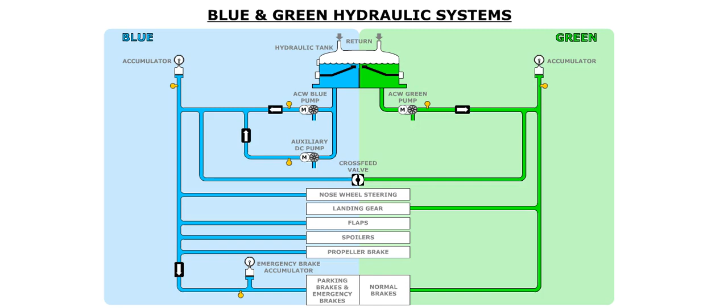The main components of the hydraulic system are located in the left landing gear fairing, aft of the main tires. These components include the pumps, accumulators, connectors and the main reservoir. Unlike other aircraft, the two hydraulic systems have a crossfeed valve that enables one system to pressurize the other system's components.

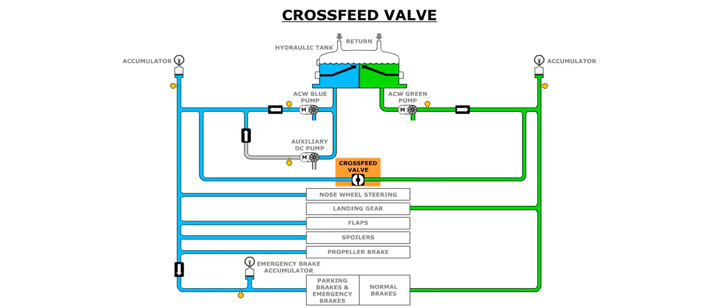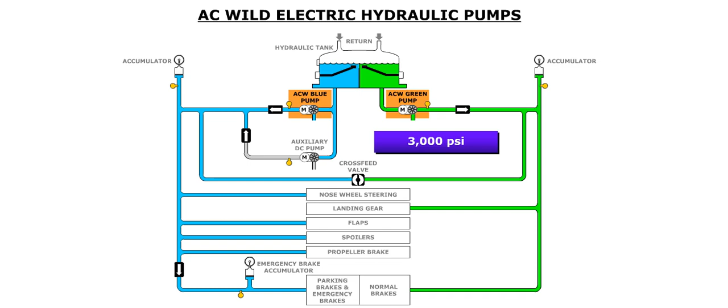Each hydraulic system is pressurized by an AC wild-powered electric hydraulic pump. Each pump delivers hydraulic pressure at 3,000 psi. The blue pump is powered by AC Wild Bus 1, and the green pump is powered by AC Wild Bus 2.

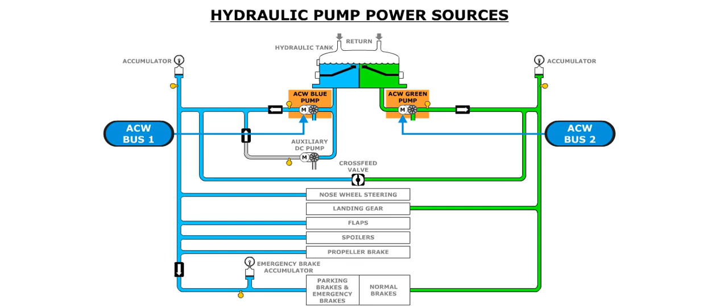The blue system has an additional auxiliary DC-powered pump that can be used to pressurize the blue system components when the aircraft is on the ground with no power. Even though you can cross-feed the two hydraulic systems, you should not cross-feed when the auxiliary pump is being used.

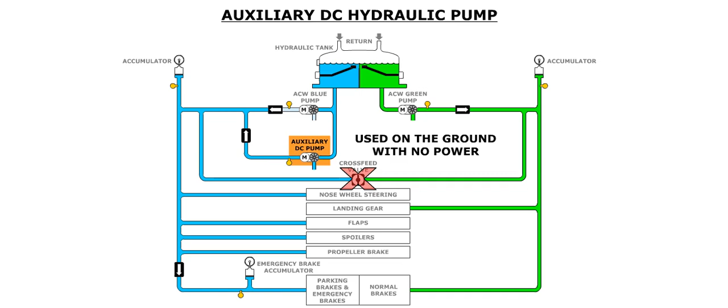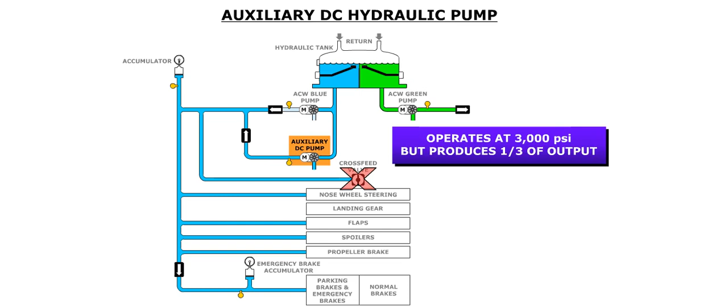Although the auxiliary pump operates like the other pumps at 3,000 psi, it is a smaller pump and it only produces about a third of the output. This pump runs automatically when the blue system pressure drops below 1,500 psi, the propeller brake is released, the gear handle is down, and at least one engine is running.

The blue hydraulic system supplies hydraulic pressure to the nose wheel steering system, the flaps, the spoilers, and the propeller brake for the right engine. In addition, the blue system supplies the emergency and parking brake system.

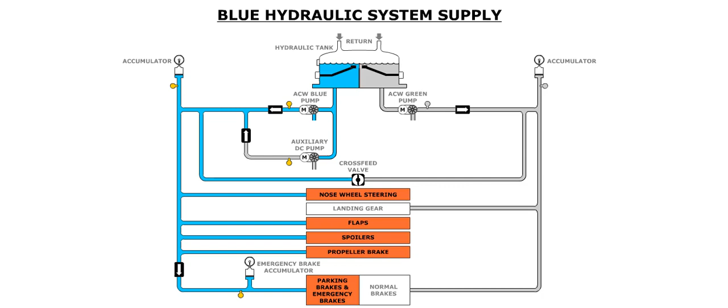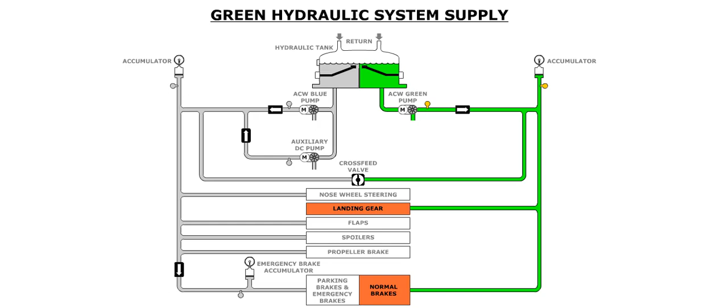The blue system distribution is depicted on the AC Wild hydraulic page on the multi-function display, or MFD. The green hydraulic system supplies the landing gear system and the normal brakes. The green system distribution is also depicted on the AC Wild hydraulic page on the MFD.

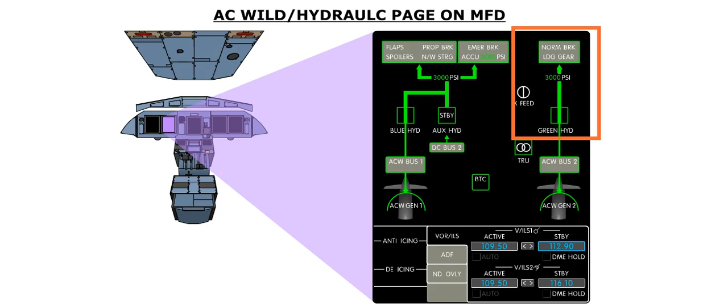The two hydraulic systems use a common hydraulic tank that is located in the hydraulic bay. This bay is in the left landing gear fairing. The tank is a direct air fluid contact tank that is not pressurized. A baffle prevents splashing of the fluid and limits foaming.

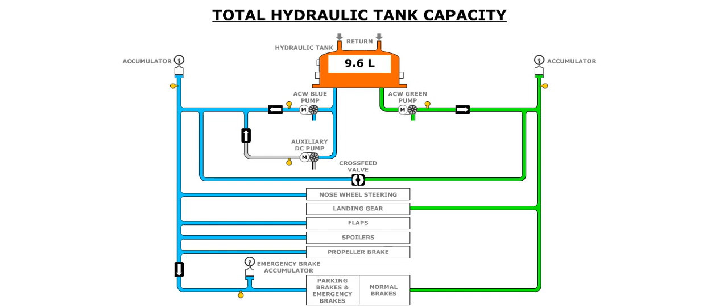The total capacity of the hydraulic reservoir is 9.6 liters. A sight gauge is used to determine the quantity of the fluid in the reservoir. When the reservoir is full, the fluid level will be even with the upper mark of the sight gauge. A full indication means that there is a total fluid quantity of 9.6 liters.

The lowest line on the sight glass is labeled refill. This line indicates the minimum quantity of hydraulic fluid required. When the reservoir fluid level is even with this refill line, there is a quantity of 8.5 liters. The aircraft has sufficient hydraulic fluid for flight, as long as the hydraulic fluid quantity is above the refill line.

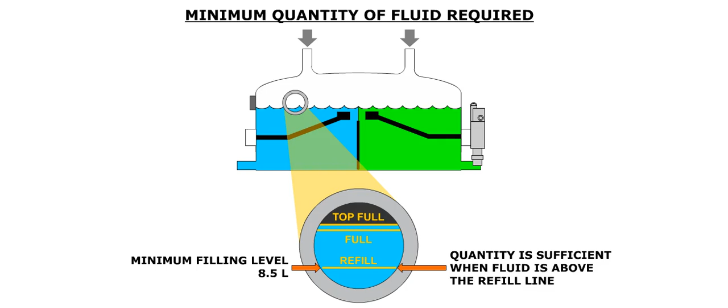When the hydraulic reservoir is filled, hydraulic fluid is added until the fluid level reaches the normal filling level. When the fluid level is even with this line, the hydraulic reservoir contains 9.35 liters.

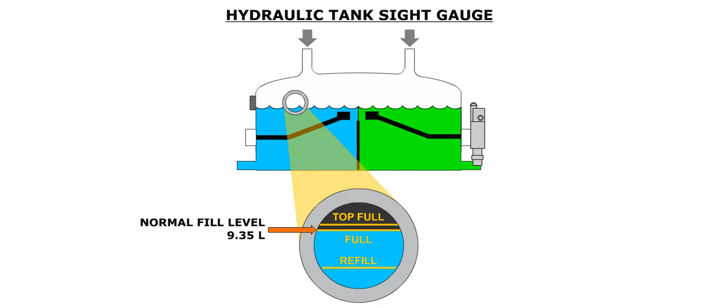Hydraulic fluid is added to the tank through the filler cap. Skydrol is the most common brand of fluid used. Approved fluids are Skydrol LD4 and Hyjet 4.

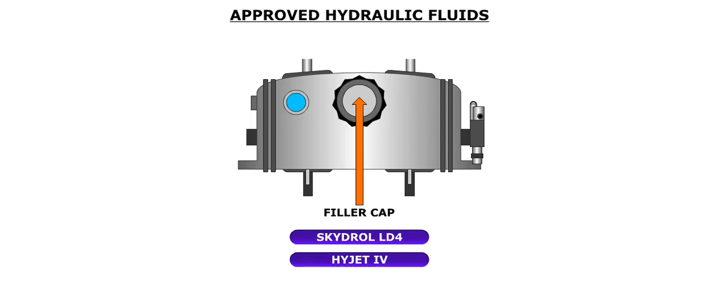The hydraulic tank is divided into two compartments that supply the blue and green hydraulic systems. Each compartment has a fluid capacity of 4 liters. The top of the tank divider is below the minimum filling level.

If a leak develops in one of the hydraulic systems, the fluid quantity in the reservoir will decrease below the level of the compartment divider. At that point, the fluid in the compartment that services the system with the leak will continue to decrease until there is no more fluid remaining in that compartment. The other compartment will continue to supply hydraulic fluid to the system without a leak. Click on the tank to see the effect.

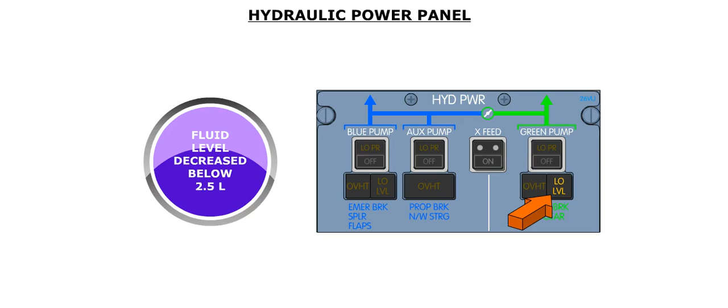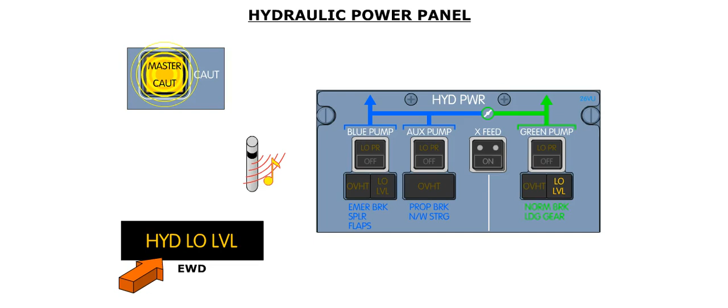The hydraulic fluid quantity in each reservoir compartment is monitored by an associated low-level light on the hydraulic power panel, located on the flight deck overhead panel. When the level in a compartment decreases below 2.5 liters, the associated low-level light illuminates amber on the hydraulic power panel, the master caution lights flash, a single chime sounds, and the amber hydraulic low-level message is displayed on the engine and warning display, or EWD. In addition, the crossfeed valve closes automatically, if it was open.

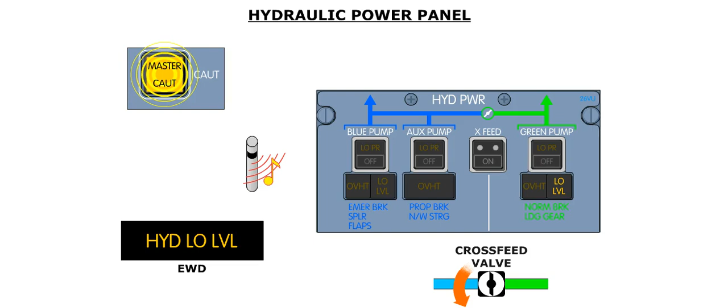Two drain ports located on the bottom of the tank are used to drain fluid from the hydraulic reservoir. Two clogging indicators monitor the blue and green filters, in order to identify the presence of particles that have entered the system. These particles could potentially cause clogging.

The indicators look like turkey pop-up timers and are visual indicators only. There are no cockpit warnings. They are located on the aft side of the reservoir.

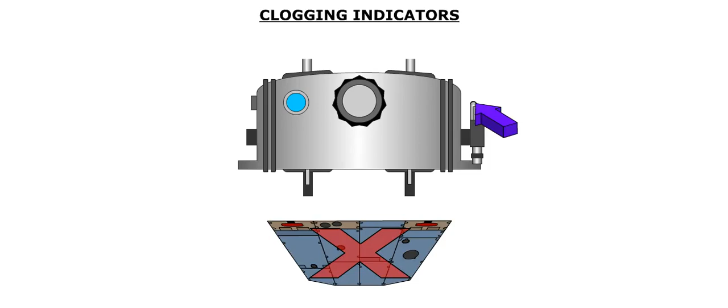An overflow port relieves any excess fluid from the tank. This excess fluid may be due to overfilling or thermal expansion. After the hydraulic fluid travels through each system, it is returned to the hydraulic reservoir through two return lines, located on the top of the reservoir.

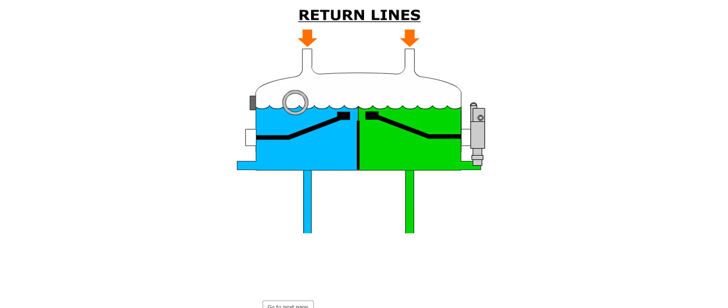We will now look at the green hydraulic system.

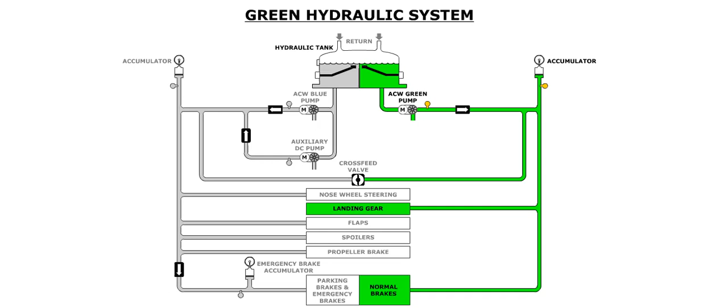The green hydraulic system is pressurized by an electric hydraulic pump. The pump is powered by the AC Wild Bus 2, and it has a normal pressure output of 3000 psi.

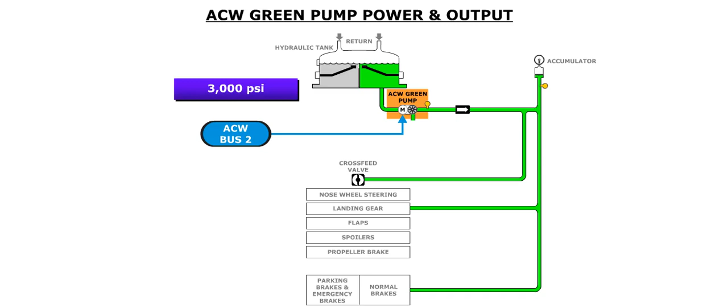The output of the green hydraulic pump is monitored by a pressure sensor, downstream of the pump output. When the green pump pressure drops below 1500 psi, an associated low-pressure light illuminates amber on the hydraulic power panel.

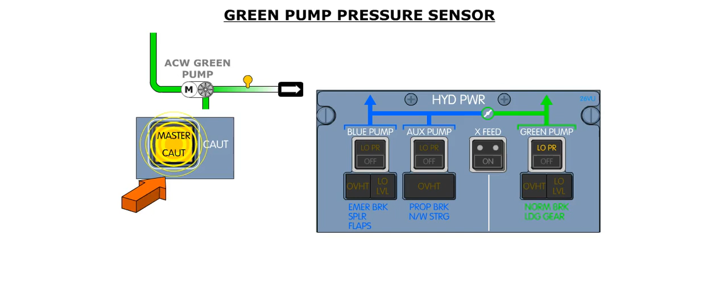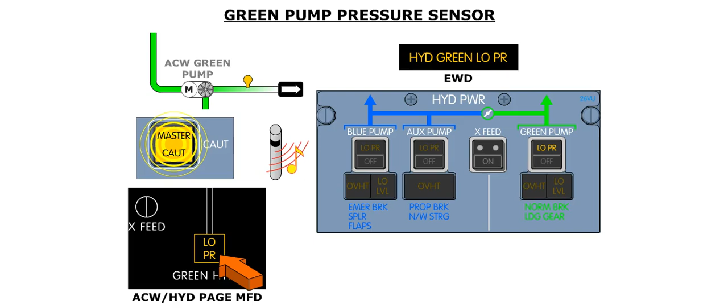In addition, the amber master caution lights flash, a single chime sounds, an amber hydraulic green low-pressure message is displayed on the EWD, and an amber low-pressure message is displayed on the AC Wild hydraulic page on the MFD. In addition, the system components powered by the affected system are displayed in amber on the AC Wild hydraulic page on the MFD.

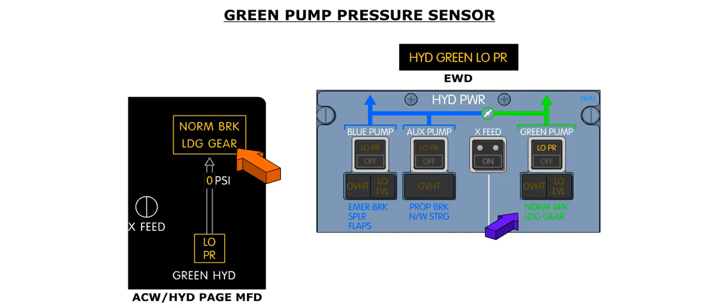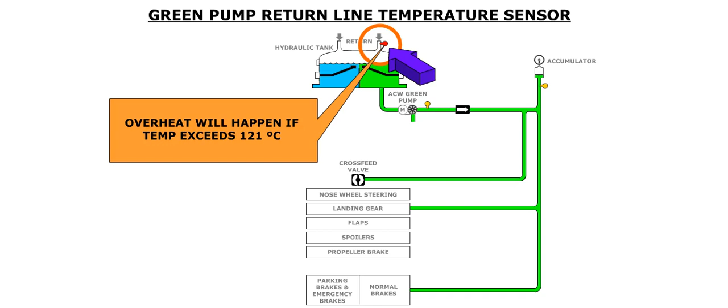A temperature sensor is mounted in the return line of the green hydraulic pump. When the pump case drain line temperature exceeds 121 degrees Celsius, the associated overheat light illuminates amber on the hydraulic power panel.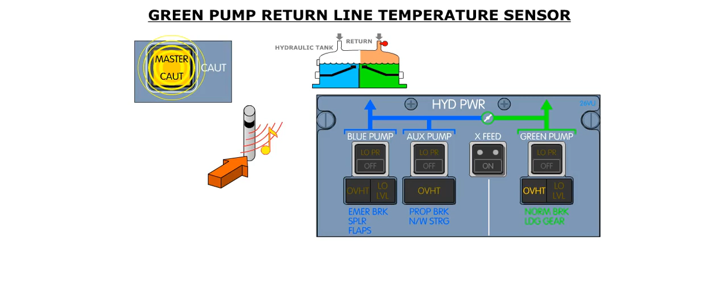In addition, the master caution lights flash, a single chime sounds, an amber overheat message is displayed on the AC Wild hydraulic page on the MFD, and an amber hydraulic overheat message is displayed on the EWD.

This indication may signify that bearing failure is impending for that pump. The corrective action for an illuminated blue or green system overheat light is to select the associated pump push button

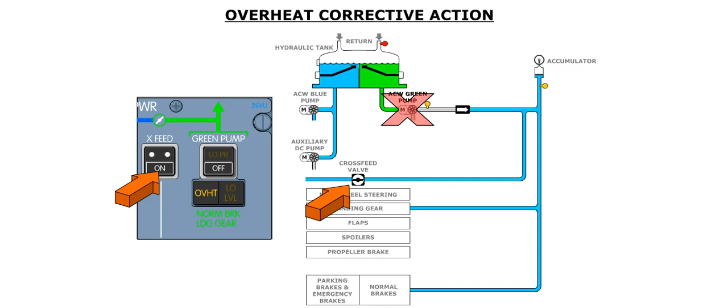to off, and then select the crossfeed push button to on. Once the system has cooled back down, reselecting the pump push button to on is permissible.

Downstream of the hydraulic pump, the hydraulic fluid travels through a one-way check valve. This check valve prevents the backflow of hydraulic pressure into the green system pump, in the event the crossfeed valve is open and the blue system is pressurized.

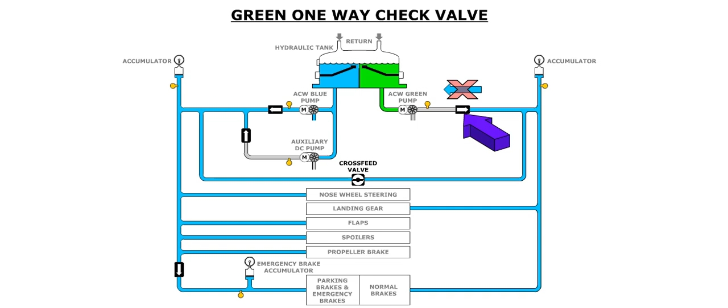The green system has an accumulator fitted in the line. The accumulator consists of a bottle that contains a charge of nitrogen. The nitrogen charge is separated from the hydraulic fluid by a piston.

The accumulator acts like a shock absorber against pressure surges due to pump operation. The accumulator also assists the hydraulic pump when there is a high demand on the system.

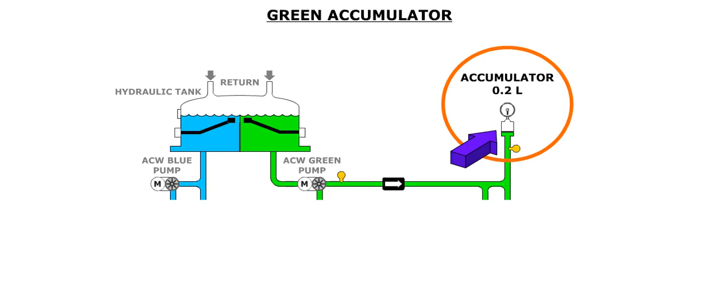The green hydraulic system pressure is indicated on the AC Wild hydraulic page on the MFD. The pressure indication is in thousands of psi. The sensor for the green system pressure indicator is downstream of the check valve.

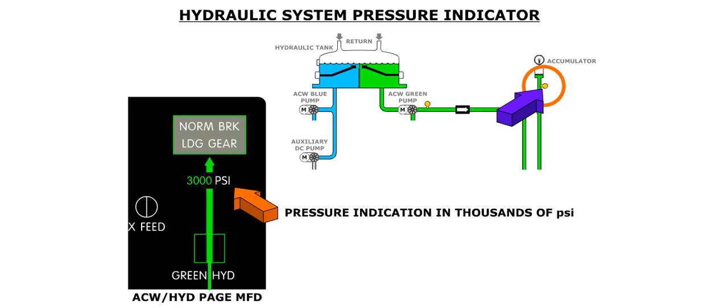The blue hydraulic system is also pressurized by an electric hydraulic pump. The pump is powered by the AC Wild Bus 1, and it has a normal pressure output of 3000 psi.

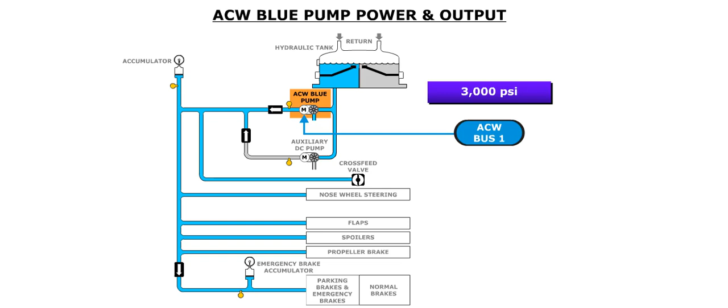The output of the blue hydraulic pump is monitored by a pressure sensor, downstream of the pump output. When the pump pressure drops below 1500 psi, an associated low-pressure light illuminates amber on the hydraulic power panel.

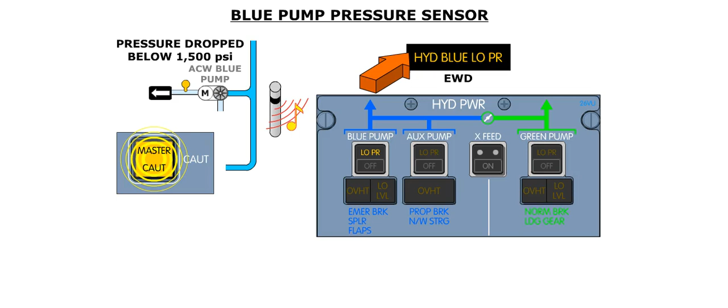In addition, the amber master caution lights flash, a single chime sounds, an amber hydraulic blue low-pressure message is displayed on the EWD, and an amber low-pressure message is displayed on the AC Wild hydraulic page on the MFD.

In addition, the system components powered by the affected system are displayed in amber on the AC Wild hydraulic page on the MFD.

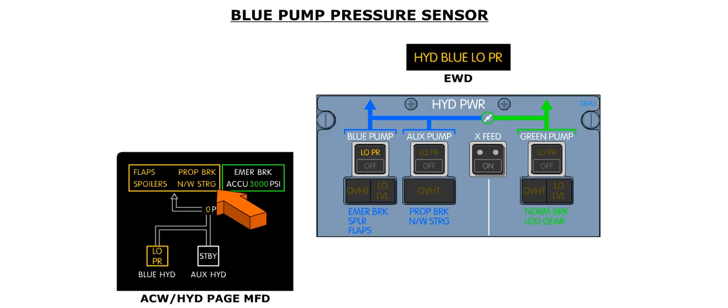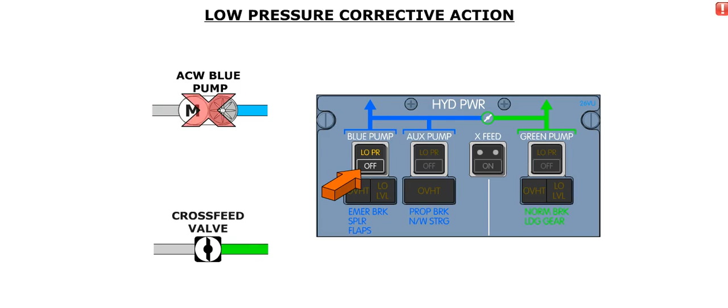Remember, the corrective action for an illuminated blue or green system overheat light is to select the associated pump push button to off, and then select the crossfeed push button to on. Once the system has cooled back down, reselecting the pump push button to on is permissible.

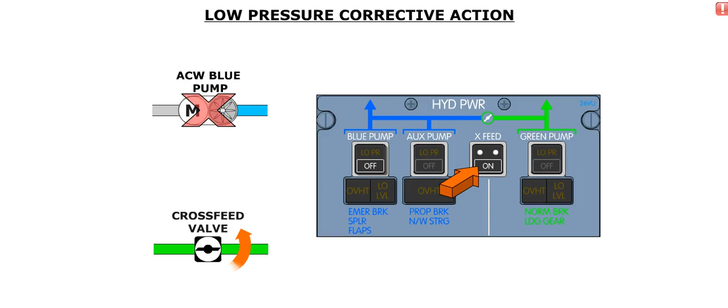A temperature sensor is mounted in the return line of the blue hydraulic pump. When the temperature exceeds 121 degrees Celsius, the associated overheat light illuminates amber on the hydraulic power panel.

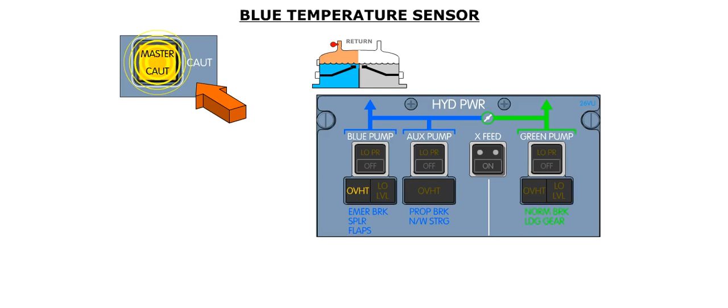In addition, the master caution lights flash, a single chime sounds, an amber overheat message is displayed on the AC Wild hydraulic page on the MFD, and an amber hydraulic overheat message is displayed on the EWD.

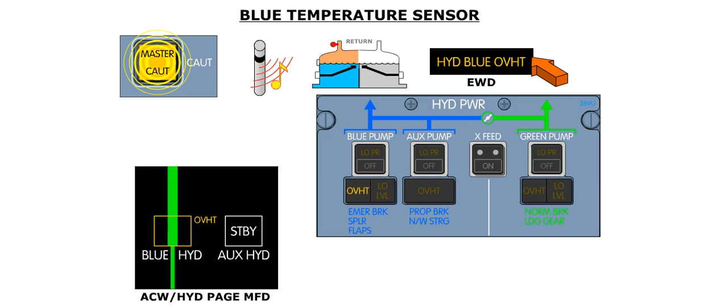The blue system incorporates an auxiliary pump. This pump draws fluid from the blue system hydraulic compartment.

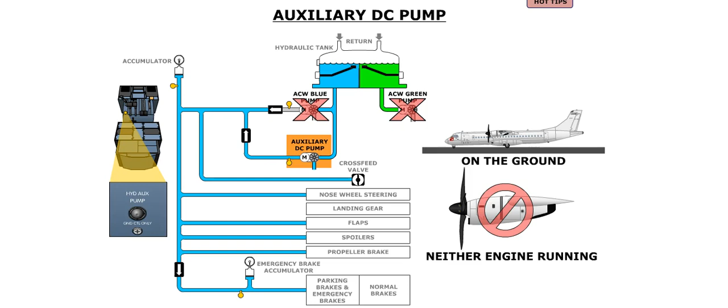This pump is used on the ground to boost blue system pressure when neither engine is running, and none of the main hydraulic pumps are operating. Once the blue system pressure is boosted, the parking brake may be reset, or the prop brake can be engaged.

The auxiliary pump also develops 3000 psi of pressure. However, this pump has a reduced flow rate. The blue system auxiliary pump is powered by either the DC bus 2 or the hot main battery bus.

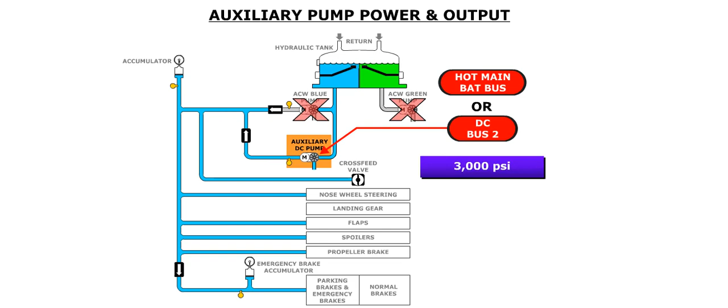Normally, DC bus 2 is the power source for the auxiliary pump. If DC bus 2 is not powered, the auxiliary pump is powered by the hot main battery bus, if the hydraulic auxiliary pump push button is depressed.

This push button is located on the forward, left-hand side of the center pedestal. Once depressed, the auxiliary hydraulic pump will run for 30 seconds. The auxiliary pump will operate as long as the hydraulic auxiliary pump push button is depressed.

You should note that you can use this push button to operate the auxiliary pump, even if no power is on the aircraft and the battery switch is off.

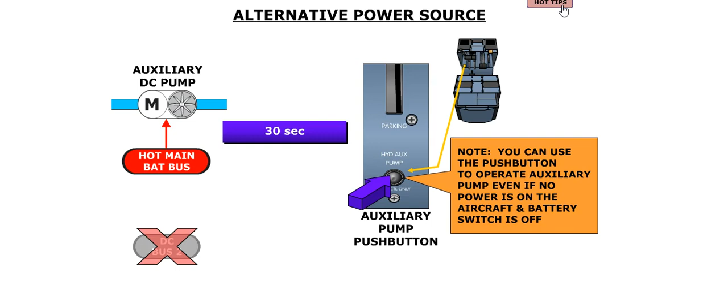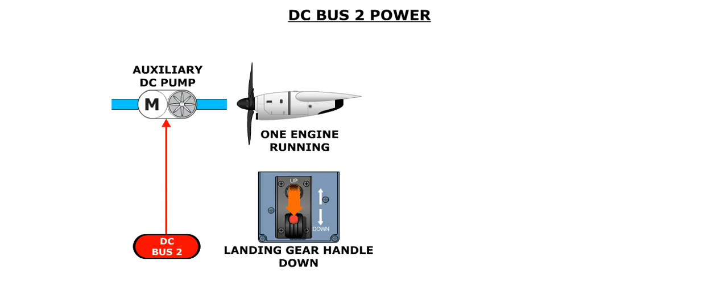If at least one engine is running, the auxiliary pump is powered by DC bus 2. The pump will operate as soon as one engine is running, provided the gear handle is down, the hydraulic auxiliary pump push button on the hydraulic power panel is depressed, the propeller brake is not engaged, and the blue hydraulic pump output pressure is below 1500 psi.

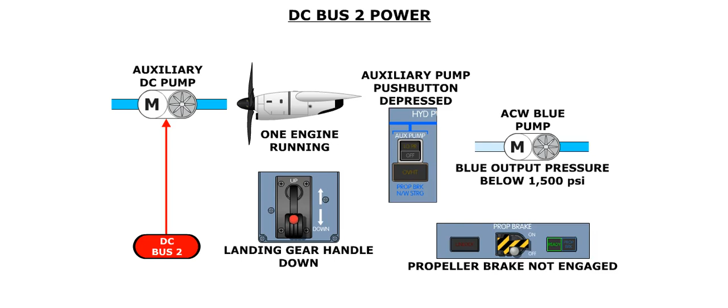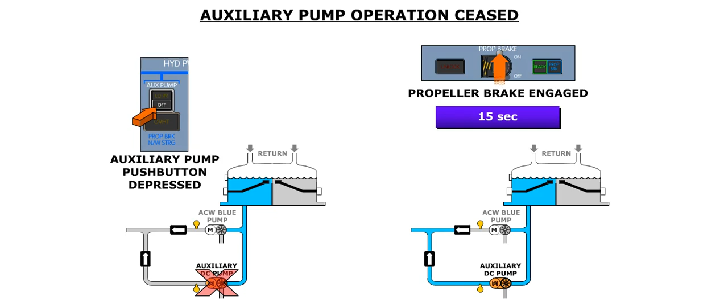The auxiliary pump will cease to operate if any of the enabling conditions is removed. If the propeller brake is engaged when the auxiliary pump is operating, the auxiliary pump will continue running for 15 seconds after the propeller brake is engaged. If the auxiliary pump started to operate because the blue main pump output pressure dropped below 1,500 psi, the auxiliary pump will stop when the main pump pressure rises above 2,100 psi.

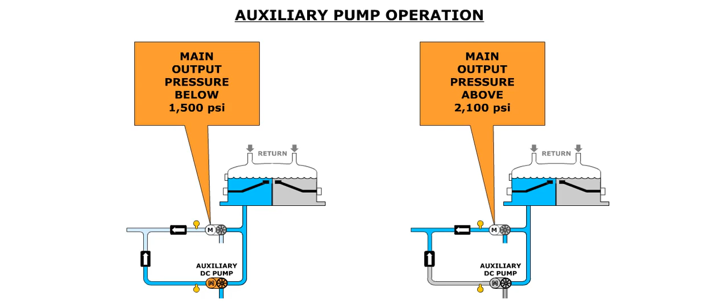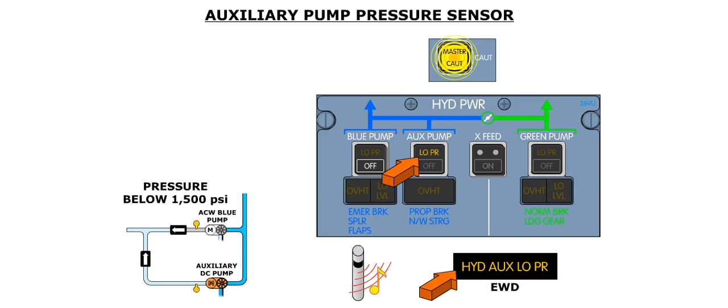The output of the blue auxiliary hydraulic pump is monitored by a pressure sensor downstream of the pump output. When the blue auxiliary pump pressure drops below 1,500 psi, the auxiliary pump low pressure light illuminates amber on the hydraulic power panel. In addition, the master caution lights flash, a single chime sounds, an amber hydraulic auxiliary low pressure message is displayed on the EWD, and the amber auxiliary low pressure label is displayed on the AC Wild hydraulic page on the MFD.

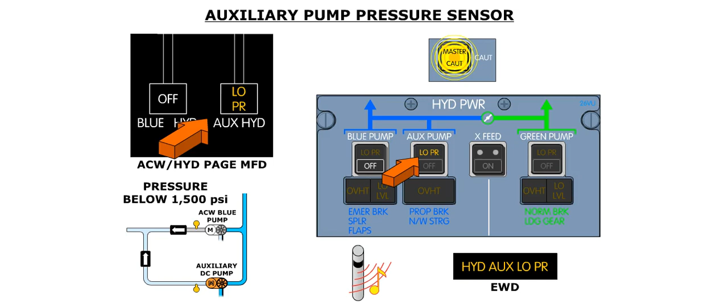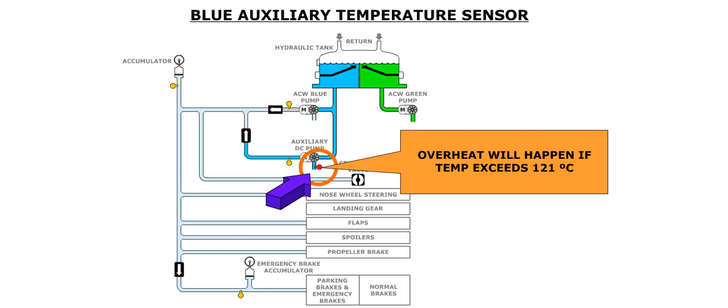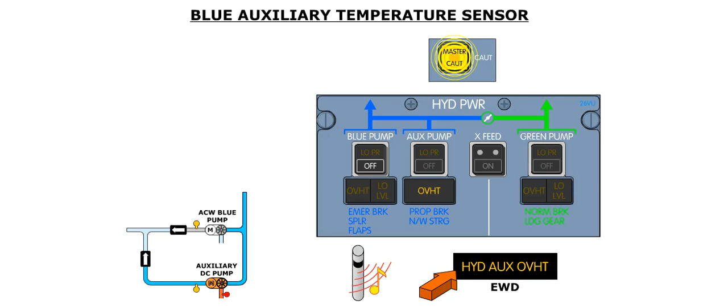A temperature sensor is mounted in the return line of the blue auxiliary hydraulic pump. When the temperature exceeds 121 degrees Celsius, the associated overheat light illuminates amber on the hydraulic power panel. In addition, the master caution lights flash, a single chime sounds, an amber hydraulic auxiliary overheat message is displayed on the AC Wild hydraulic page on the MFD, and an amber hydraulic overheat message is displayed on the EWD.

The auxiliary pump supplies hydraulic pressure to the same line that is supplied by the blue hydraulic pump. One-way check valves prevent the backflow of hydraulic fluid into either pump.

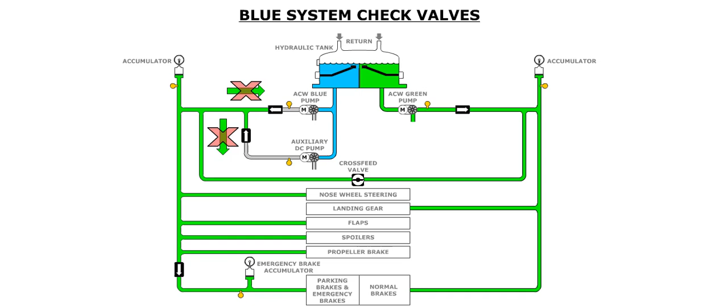The blue system has an accumulator fitted in the line. The accumulator is exactly the same as the green system accumulator, and it performs the same function.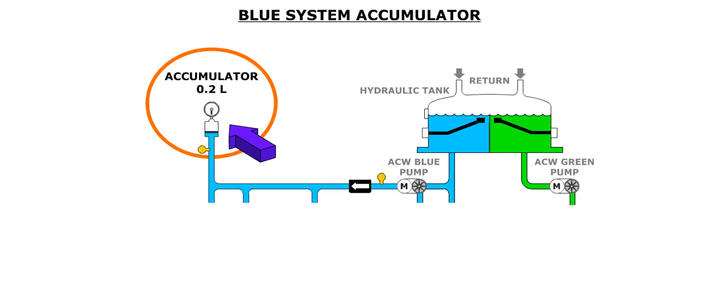The blue and green hydraulic systems are interconnected through a crossfeed valve. If one pump fails, pressure to the affected hydraulic system can be restored by opening the crossfeed valve. The crossfeed valve is controlled by the crossfeed push button on the hydraulic power panel. Click on the crossfeed push button to open the crossfeed valve.

Once the crossfeed valve is opened, it will automatically close if the fluid quantity in either hydraulic reservoir compartment drops below 2.5 liters. This will prohibit adding fluid to a system that could possibly be losing fluid, and prevents the other system from losing fluid and entering a low-level condition.

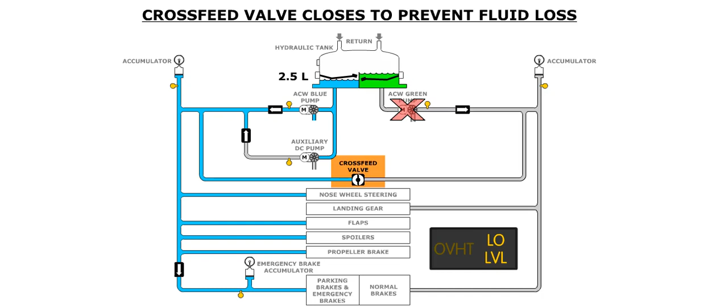A fluid level below 2.5 liters will cause the corresponding low-level light to illuminate on the hydraulic power panel. If either low-level light is illuminated, the crossfeed push button is inhibited, and you will not be able to open the hydraulic crossfeed valve. This situation is indicated on the ACW hydraulic page on the MFD. The crossfeed icon has a white inhibit label.

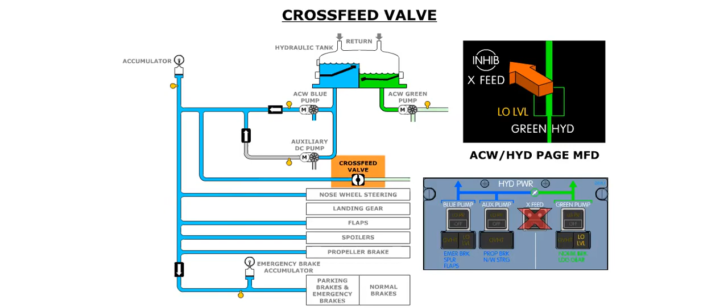The status of the crossfeed valve is displayed on the ACW hydraulic page on the MFD. When the valve is open, a green line will connect the two systems. Otherwise, only a closed crossfeed valve is depicted. This screen depicts the various icons for the crossfeed valve.

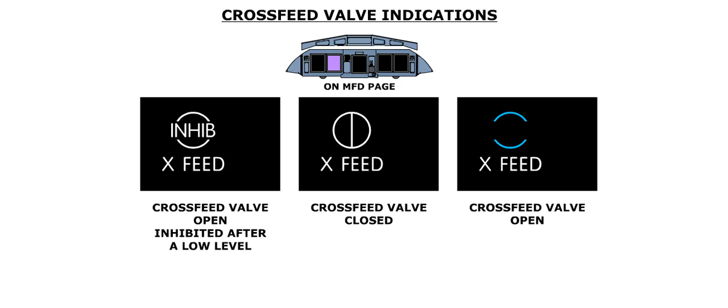The crossfeed valve is electrically controlled. It is powered by the DC standby bus. The crossfeed valve will automatically close if power is removed from the valve.

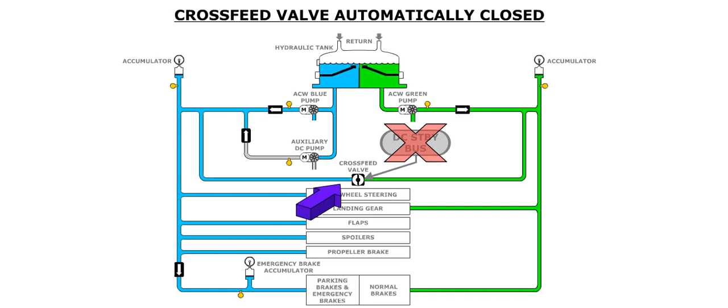The emergency and parking brakes have their own accumulator. The accumulator is located after a one-way check valve. Unlike the main hydraulic system accumulators, this accumulator stores enough pressure to allow for 6 applications of the parking brake. The pressure of this accumulator can be read on the pressure indicator, located on the left maintenance panel. In addition, the emergency and parking brake accumulator pressure is displayed on the ACW hydraulic page on the MFD.

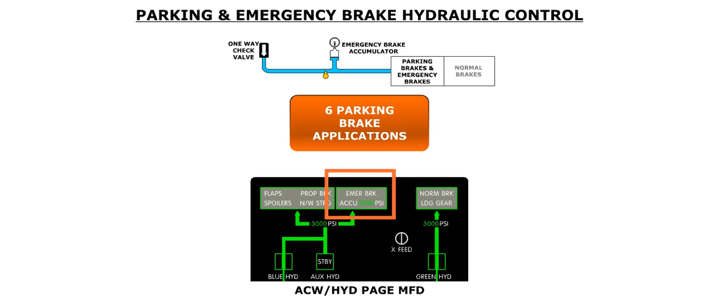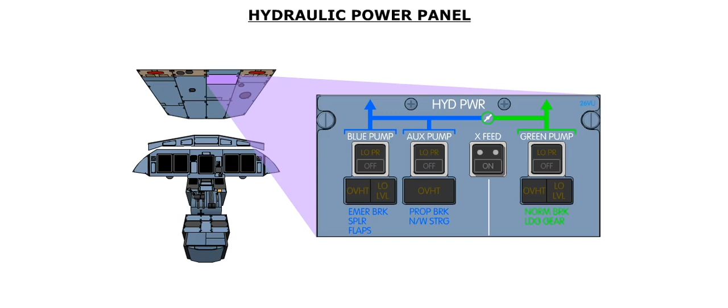As you saw earlier, the hydraulic system is controlled by the hydraulic power panel located on the flight deck overhead panel. The systems supplied by each hydraulic system are listed under each pump push button. A simplified schematic of the hydraulic system is etched in the faceplate of the hydraulic power panel.

The main hydraulic pumps are controlled by the associated pump push buttons. The push button and alert lights of the blue system push button are powered by the DC emergency bus. The push button of the green system is powered by DC essential bus. The alert lights of the green system push button are powered by the DC emergency bus.

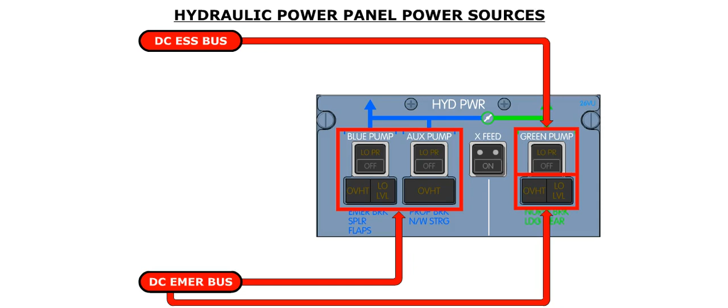Each main hydraulic pump is controlled by its associated push button. A pump is energized when the associated pump push button is depressed, or in position. A pump is deactivated by placing its associated pump push button in the released, or out position. The white off light illuminates when the push button is released out.

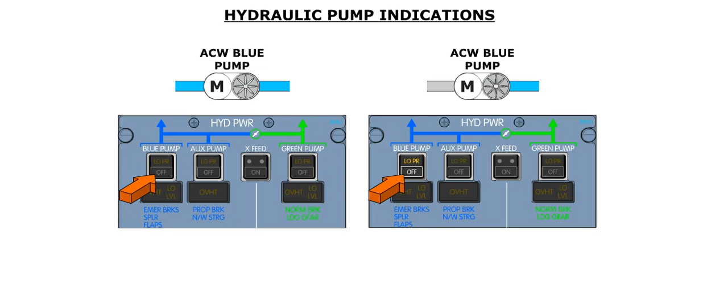On the ACW hydraulic page, a pump that is running is indicated by a green square with a vertical line. When a pump is selected off, the vertical line is replaced with the white off label. This screen depicts the various indications for the hydraulic pumps.

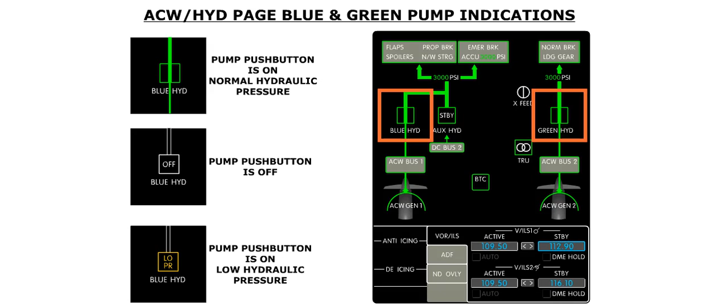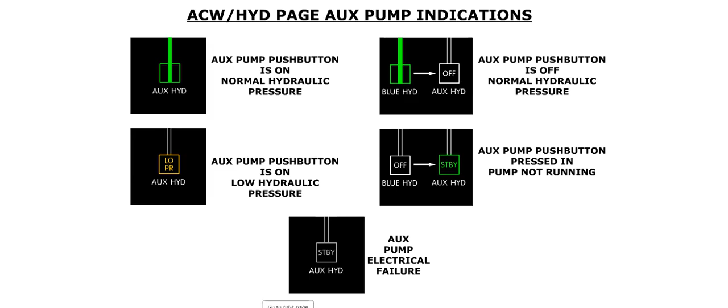Hydraulic system pressure is displayed at the top of the ACW hydraulic page. The indication is green when the associated pump output pressure is greater than 1,500 psi. Otherwise, it is displayed in amber. As mentioned previously, the components powered by each system are also displayed in amber if the associated pump output pressure is below 1,500 psi.

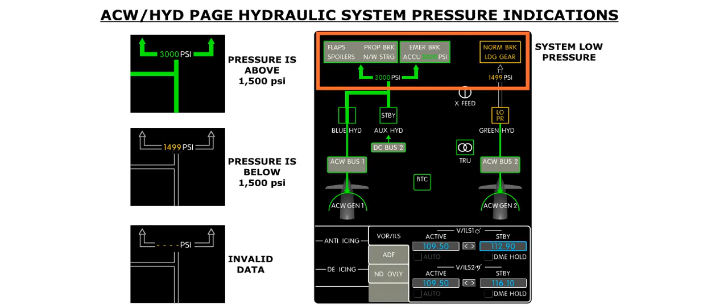This concludes the hydraulic system module.